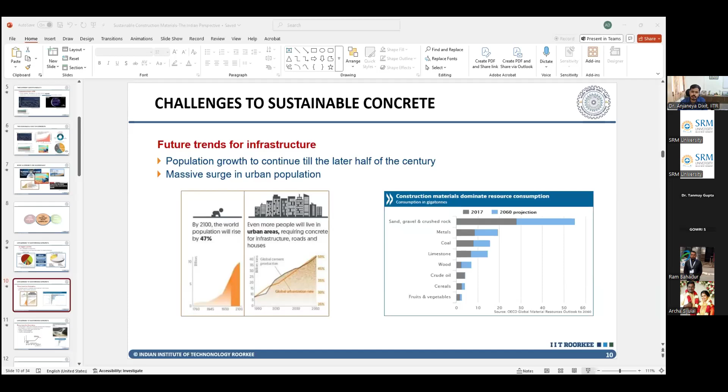Now, why is this important? It's important because all the constituents of OPC, or any form of cement, come from earth. So any material that is able to replicate the composition as is means that you will not require a lot of extra material or extra processes other than the bare minimum needed, such as heating, calcination, clinkering, etc.

So OPC as such is very optimized. Add to that, you have about one century, or even more now, almost 1.25 centuries worth of data on how OPC based concretes behave.

And that's very important because we want to construct a lot of our buildings that we want to last for 100 years. The embankments that were created for the rail Chenab, on their own, are supposed to last for more than 100 years.

That is possible because we know how the concrete is going to behave in that environment under those loading conditions. We can predict what will be the strength left after 100 years, and whether it will be good enough for the bridge or not. So doing away with OPC with something that does not have a big knowledge base is the challenge.

Furthermore, it's not like our population is going to come down very soon. There are predictions that it might peak much earlier than was anticipated, but we'll still see about 47% rise by the end of this century.

We have seen this in India that rural centers are losing their population and most of them are moving towards urban centers. And urban centers, by definition, require a lot of concretization. Where is that concretization going to come from? From all the sand, gravel, and rocks that we're using.

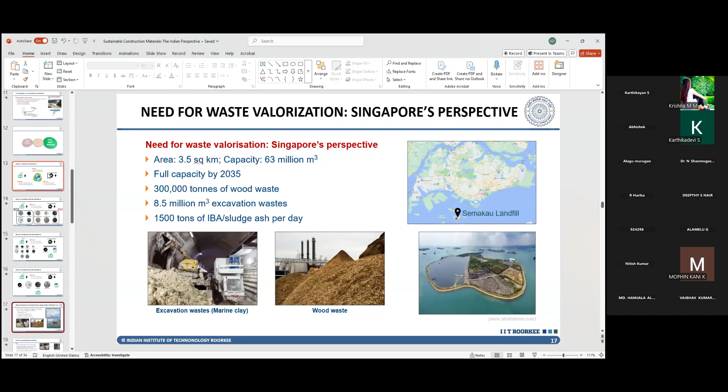Thank you. So this is what I was talking about, that we recycle, we choose the right kind of material for recycling, based on the compatibility, the availability, and the economics. And based on that, I'll discuss these three materials which are in different stages of acceptance and research.

And I was talking about Singapore. So on your screen, at the bottom there is a small island, and the photograph shown here. Singapore is dumping all its burnt waste, the ash, here, and has no further backup plan once it runs out of this island. Half of that island is only the available land for their ashes. So they're aggressively trying to recycle or reuse as much of their material as possible.

So what we did in Singapore was we used clay, which if you heat, you can produce a pozzolanic material that can be used as an alternate to cement. And not just that, if you use it in the right amount, it can not only impart good strength, it can also improve your durability.

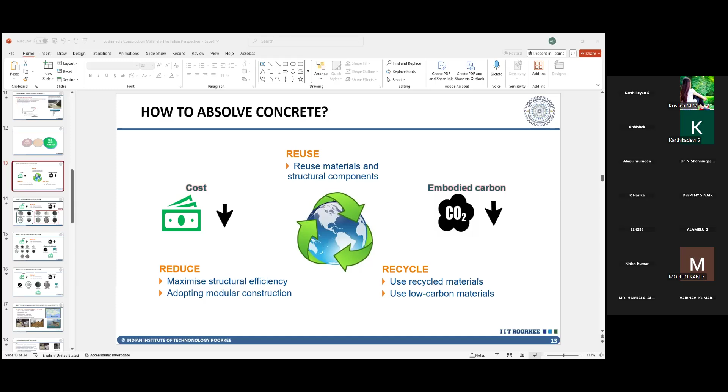And in India, you have IS codes for Portland calcined clay pozzolana, as well as a very recent code, IS 18189, which came a couple of years back. That's on limestone calcined clay cement, LC3.

So during my research in Singapore, we tried a lot of ways to utilize this excavation waste, majorly as a binder, but we also dabbled with using it in combination with other binders, making pellets out of it, and coming up with lightweight aggregates that could either be used for non-structural applications or even for structural applications.

Coming back, in Singapore we did about 5 types of different clays with varying kaolinite content. Now kaolinite, for those of you who may not be aware, is a naturally occurring mineral in clays.

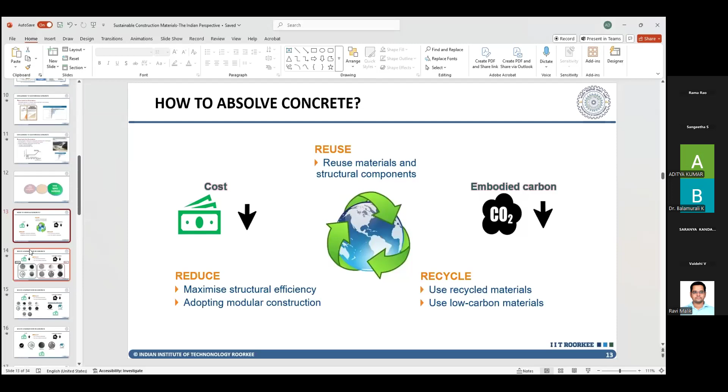Okay, right. So this is again the compatibility, the availability, and economics issue. And the landfill I was talking about in Singapore, where they're dumping all their ash.

And this is what I was talking about. So kaolinite is a naturally occurring mineral in clay. If you heat that clay, if you heat the kaolinite to 600 or above temperatures, there is atomic restructuring that occurs at that temperature. And if done right, you obtain a different structure, like this. This structure is called metakaolin. This metakaolin has reactive aluminates and silicates which can react with the calcium hydroxide that is generated because of cement, when water is added to cement, which is basically a pozzolanic reaction.

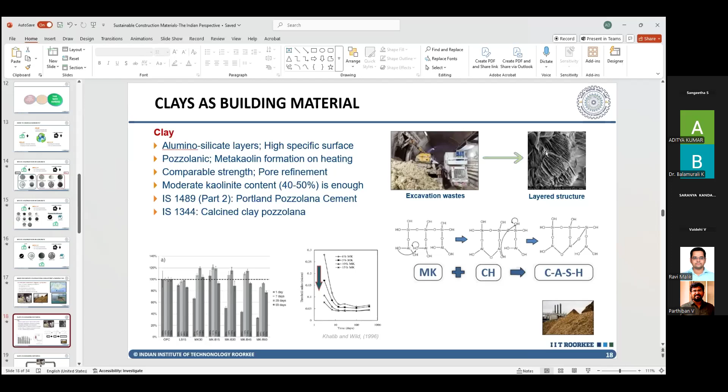Even fly ash works the same way. Fly ash plus calcium hydroxide gives you CASH, or calcium aluminate silicate hydrates, which are the binding entity in concrete. So with that idea, we developed binders and fillers out of this excavation waste. We also developed pellets, which were used as lightweight aggregates for structural and non-structural applications.

We studied about 5 different clays with different kaolinite content, and therefore different reactivity, because the more the kaolinite, the higher the reactivity. We found that depending on which kind of clay we are using, compared to a normal OPC based concrete or mortar, we were able to get up to 3 times improvement in durability, measured using the rapid chloride permeation test.

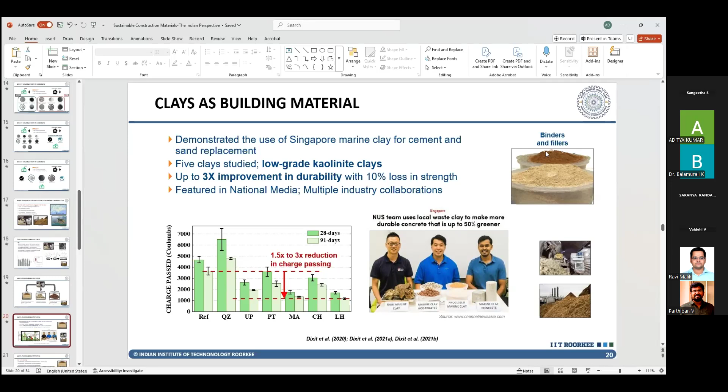We got featured in the local news channel for our work. In IIT Roorkee, I'm using clay without heating for generating printable mixes, low carbon printable mixes, and we have achieved very good performance, because clay can act as a natural viscosity modifier and can help improve extrudability, the ability of concrete to come out of the printing nozzle, and buildability, the ability of concrete to stack up in layers without collapsing.

So clay is something that has very easy acceptance in the construction industry, because even historically, surkhi is a common word that has been used, and surkhi was a very common ingredient added along with lime, because bricks were being manufactured millennia ago, and lime was readily available to them. So they used to add surkhi to lime to solidify their mortars.

This is nothing but a pozzolanic reaction happening. You use lime, which is calcium hydroxide, and surkhi, which is nothing but burnt clay, metakaolin to some extent. You add the two and you have pozzolanic reactions, producing insoluble hydrates which will not wash away with water.

So clay, the understanding around clay, its global availability, and economics also matter. If you try to produce it, we are still yet to break even. But if you're producing cement using metakaolin, or the limestone calcined clay cement (LC3) I talked about, it's very close to the cost of normal OPC.

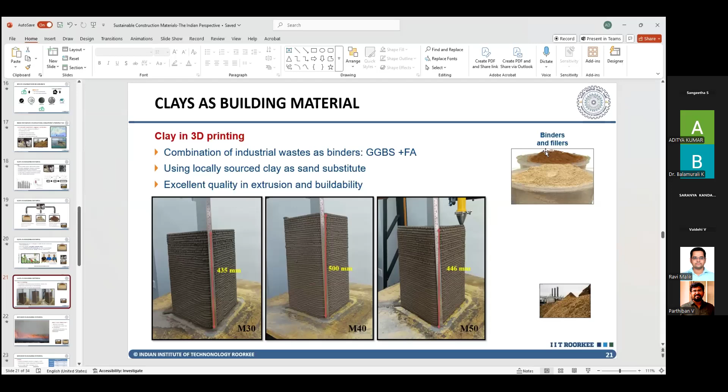Jumping to the next material. Incineration in India is a very big problem. North Indians, you are at the heart of that incineration problem in Sonepat, and you would see every year for 2 months, and the residual effect for the remaining 4 months at least, so much carbonaceous particulates in the air that it has actually become a calamity, and we are not able to find large scale solutions so that the alternative to burning becomes profitable.

One of the ways to do this, apart from other techniques, we have started using rice straws to produce plates, utensils, cutleries, or papers and pulps. A big industry can be concrete itself. This second material, biochar, is very much known in research, but is yet to be translated into industry. So that brings us to the second stage of material.

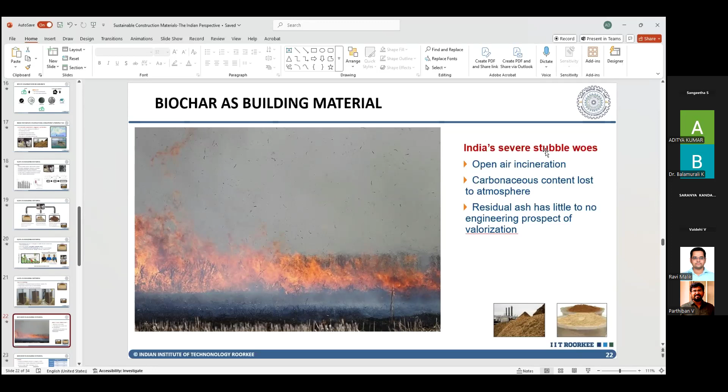What is biochar and how do you produce it? If you burn any wood waste or organic matter in open air in the presence of oxygen, you are letting the carbon in those materials interact with oxygen, produce carbon dioxide, and go away into the atmosphere. But what if you heat that in the absence of air? In such a case, all the fats, lignins, cellulose, hemicellulose in the wood waste will go away, and what remains is about 70 to 80% pure carbon.

If you look at the table on the right top, this was another study we did with raw sawdust, where we had about 44% carbon content, elemental carbon. The moment we pyrolyzed it at 500 degrees centigrade, heated without oxygen or air, the char obtained was more than 70% carbon. So essentially, all this carbon which would have gone to the atmosphere, you have saved and kept inside.

The advantage, in addition to all this, is these materials are porous. These are some electron microscope images, so you see there's pores in those materials. Now these pores are excellent sites to retain water, and if used in concrete, they can act as what's called an internal curing agent. A material that holds water in its pores, and when mixed in concrete, when the concrete is gaining strength, it can provide water from the inside also.

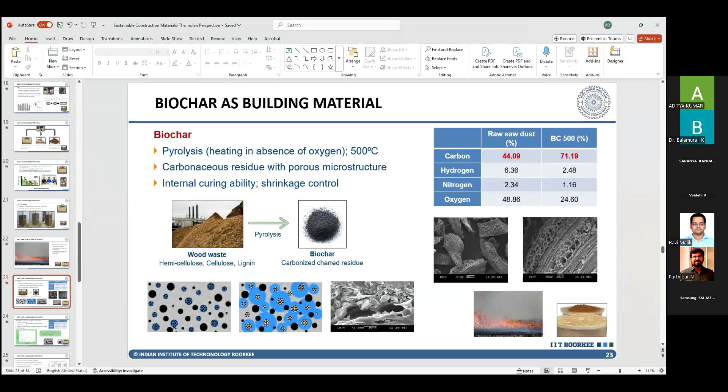So that's the advantage you can get from biochar, in addition to storing carbon directly inside that char. But the challenge is the pyrolysis condition, and from where you're getting this material, the source material, the feedstock. Because some organic matters such as peanuts are high in phosphorus. Now if you use these materials, make a char out of it, and then use it in the concrete, you're adding phosphorus into the concrete, which is not good. We try to limit all the alkalis and such kinds of materials in limited form when we're using them in concrete.

The other thing is how stable your char is, because it's an organic matter, and in concrete we have a big no for any organic matter to go in. You have to ensure that the char you're using is virtually essentially an inert material.

To do that, you use what's called an oxygen to carbon molar ratio. You test that, you find out how much oxygen is present in comparison to carbon. The less the oxygen, the better it is, because it's the oxygen that creates those reactive functional groups which might do unwanted reactions. So the less the oxygen carbon ratio, the higher the stable life of the char is. Usually we prefer 0.2 or below, which is very easy to obtain through normal pyrolysis itself.

Furthermore, the temperature at which you heat the biochar, and the speed at which you reach that temperature, control the amount of pores and the type of pores generated in the biochar. This is important because if you want to use the biochar for internal curing, you want a specific size of pores to be available, no larger, no smaller. Smaller pores will not be able to hold water effectively, and larger pores will create voids inside the concrete that, instead of providing internal curing, will act as weak zones.

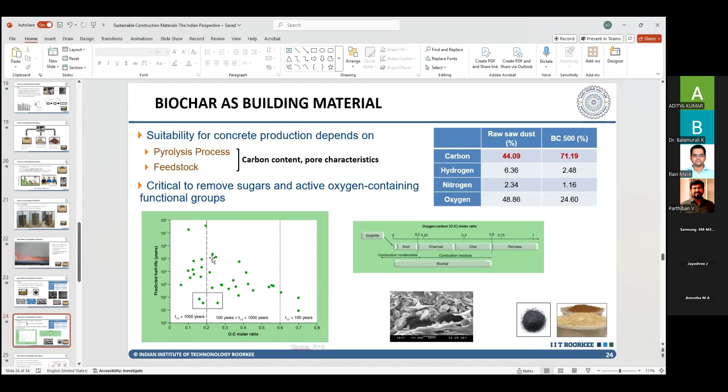So what does the research say around this? Well, if you're using normal concrete, you can go as high as 10% by weight of cement. So suppose you're using a normal concrete with about 350 kg per cubic meter of cement content, you can add 35 kg of biochar in it. And that 35 kg, assuming 70% carbon content, would be somewhere around 24-25 kg of pure carbon that you're storing inside the concrete.

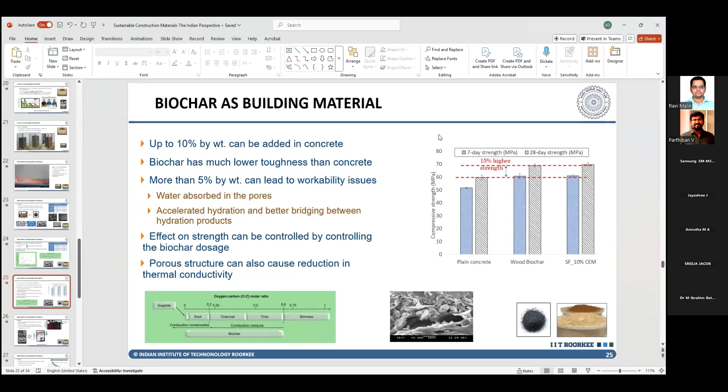Multiply that by another 3.67 times to get the carbon dioxide equivalent that you have stored inside your concrete for one cubic meter. And not only that, when you're doing so, you're able to increase your strength as shown here, because the internal curing effect of your biochar can help improve the hydration. Even though the biochar itself is weak, the additional hydration products that it generates can improve the strength.

Now, a very peculiar case of UHPC. UHPC is ultra high performance concrete. These are very special types of concrete that have strength above 120 megapascal. So the majority of my PhD research was on UHPC, and I used biochar to see if that internal curing effect could be obtained in these concretes also, because for UHPC, external curing works very ineffectively. On the first day itself, the density of the UHPC becomes similar to what a 28-day-old normal concrete would be. So in a 28-day normal concrete, if you try to cure externally by putting it in the water tank, it will not work. The same is the case with UHPC.

So we tried to cure it internally. But what we found was, yes, there was a very significant increase in the amount of hydration taking place. But a bigger finding was that we were able to control the shrinkage in UHPC. Again, another problem in UHPC is that you trade strength with shrinkage - very high strength, but also very high shrinkage. We were able to control that shrinkage by using biochar, because this biochar kept releasing water in different parts of the concrete, and it didn't allow the concrete to shrink as much as it would have without biochar.

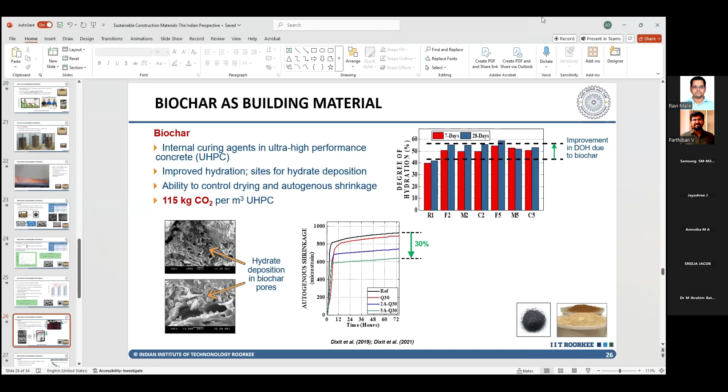The same is the case with normal concrete. You can see a large reduction in shrinkage if you're using biochar. And as I've said, you can also see high early strength if you're using biochar, provided you have prepared it correctly from the correct feedstock.

So this is about biochar. For now, biochar has not yet found commercial acceptance because the feedstocks that are being used traditionally don't have utility in the concrete sector. Organic matters generally stick to one industry, which is organic based, like paper pulp or pulp-based utensils or cutlery. So it is yet to come at large scale in the industry. The translation of research to the field is still awaited, but the research is overwhelmingly positive. It says you have to fine-tune the biochar, but you can get desired properties relatively easily.

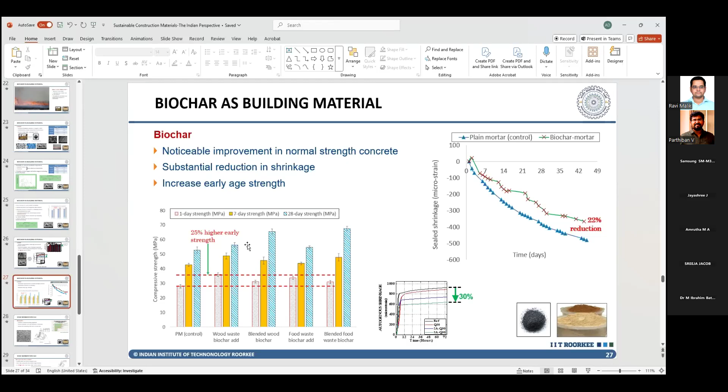That brings me to the third leg of this talk: MSW, or Municipal Solid Waste Incineration Ash. In India, we've started to become more aware of how we deal with municipal solid waste. The Ghazipur landfill is one of the biggest eyesores and a real nightmare for the administration to get rid of. I'm glad the other two landfills near NCR are being taken down, and in due time I think the Ghazipur landfill will also be taken down and repurposed.

But what do they do with the waste they're taking out? That waste has to go somewhere. If it's being reused or recycled, very good, but I don't think a big chunk of it is reusable or recyclable. So why don't we incinerate that? The Government of India has taken a lot of initiatives in the waste-to-energy approach.

What they're essentially doing is taking the waste, segregating it properly, separating out all the dry waste that has good calorific value, and incinerating that. By doing so you get two advantages: you reduce the volume by about 70 to 80%, and more importantly, you're able to generate electricity out of it.

When I gave the example of Singapore, where they incinerate all their waste and dump the ash there, they generate 5 to 8 megawatts of energy depending on how much waste they're burning. This is all from just one plant, and they have 3 or 4 similar plants. Their energy requirements are in the thousands of megawatts, but still, being able to generate electricity just from waste management is a very good idea.

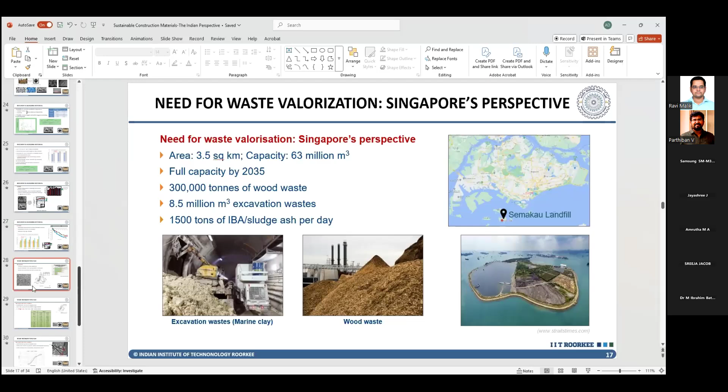As a matter of fact, one of the waste-to-energy plants in Bidadi, Bangalore generates about 11.5 megawatts of electricity just by burning waste. So incinerating municipal solid waste and generating ash is a good way to manage your waste. The ash generated is relatively inert. Mostly 80% of the total ash is bottom ash, and 20% is fly ash that goes through the exhaust. So I'm focusing on the bottom ash for the moment.

Looking at India's trend, particularly in the major cities where this incineration will actually work — first of all, incineration is not something that can be applied to every municipality. A tier 3 city, it definitely will not work, it will not be viable. But for a tier 1, or even tier 1.5 or tier 2 cities, they generate 6 to 7,000 tons of waste every day, and out of that at least 50% is dry waste.

So their waste-to-energy plant works well, but they still become economically unviable because the electricity they generate, they sell at approximately 7 to 8 rupees, whereas from solar or thermal you get it at much lower cost. So to stay competitive, they have to find other avenues of producing money. What can that avenue be? Produce the ash and sell it as a construction material. Of course treatment work etc. is needed, but that's one of the financial models they can try.

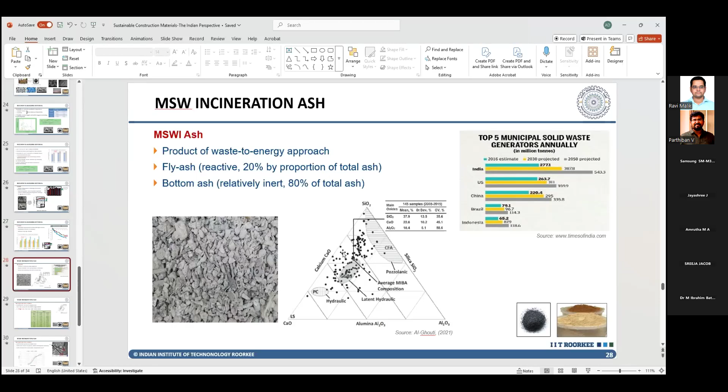So when we tried this out, we got ash from one of the plants in Sonepat itself, and what we found was the bottom ash is very high in silica, alumina, and calcium, but also in phosphorus and alkalis. And that's a big red flag. We don't want these materials — heavy metals, sulfates — in our construction material that's eventually going to end up in concrete. So that is a challenge.

Also, the research around municipal incinerated ash, MSW ash, is also nascent. It's very variable because the MSW itself is variable. You don't even have to go to different cities to compare — take just one city and monitor the waste ash for just one month, and you'll see such a big fluctuation that it becomes very difficult to suggest one technique for how to make this ash usable for engineering applications.

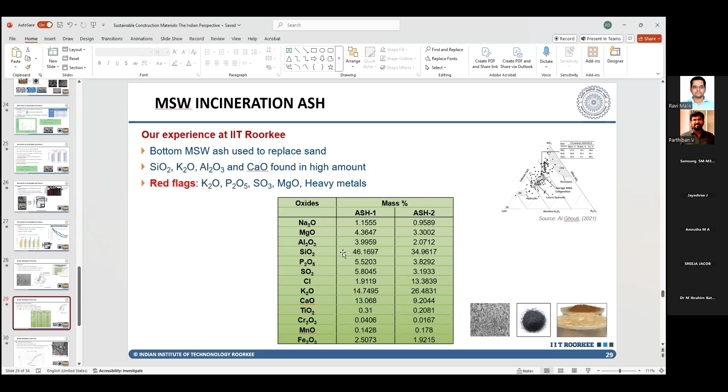So right now we are trying to replace bottom ash as a sand replacement. But the challenge is that this ash is highly porous. It stores a lot of water when we try to replace natural sand with this ash, and it reduces the workability really bad. Essentially, the ash is not as strong as the sand it replaces, so you see a big drop in the compressive strength too.

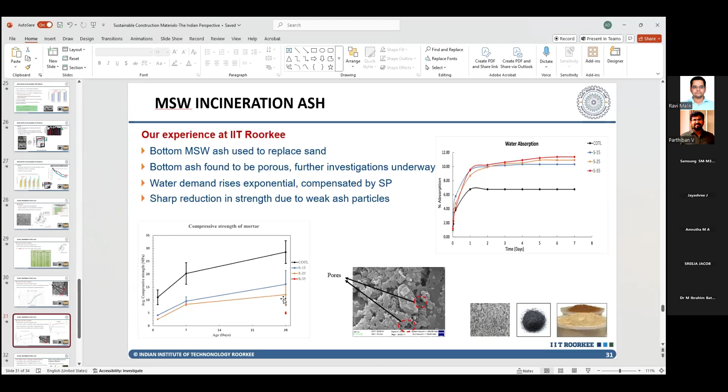This is in the nascent stage, and only time will tell how the research progresses. But if tried, municipal ash presents a big opportunity, because in one major city in India we generate 5 to 8,000 tons of waste. If waste management and segregation become efficient, this idea can take up, but segregation in India isn't effective yet, so a lot of low calorific value material ends up in these plants. A plant rated to generate 10 megawatts might need additional fuel, or use extra electricity, to burn materials that are wet or of low calorific value. That's a big challenge right now.

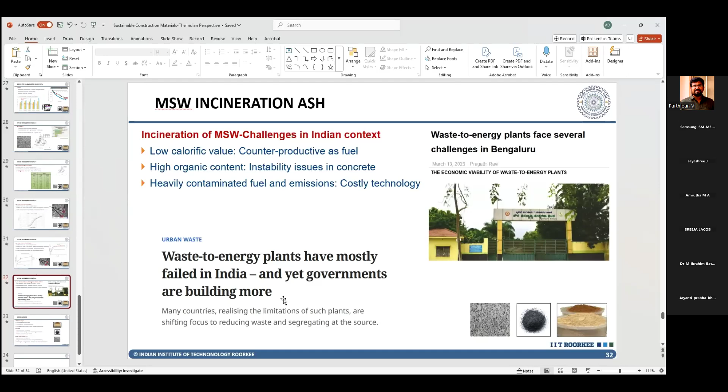But because we started incinerating hardly a decade ago, we're still new to this. We'll learn our way, and if we keep trying, we'll find a way out. So, to conclude, I discussed three different materials that are alternates to concrete: two alternates to cement, and one alternate to sand, at different stages of research and practice. Calcined clays are very well accepted in the construction sector, biochar is well established in research but yet to be taken up by industry, and municipal ash is still new in both research and construction industry.

So with that, I'd like to stop. I thank SRM University again for having me over and giving me the chance to speak on this topic, and I'll be happy to answer any questions if there are any. Thank you.

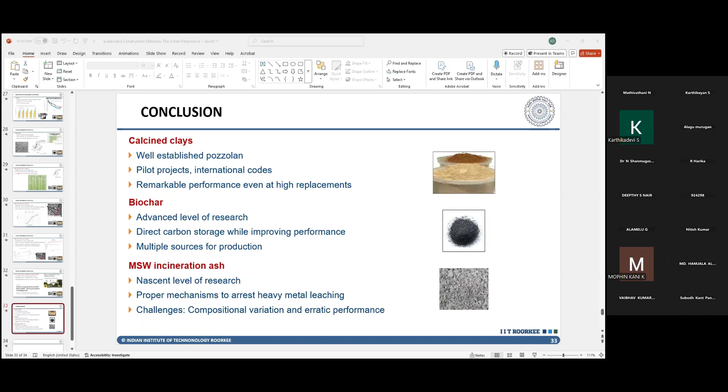There's a question: how sustainable and market-available is biochar? In India, biochar is yet to take up. We are not producing biochar for the purpose of construction. A lot of biochar, or rather activated carbon, is being produced for filtering purposes, as activated carbon is a big constituent of filters. So traditionally, whenever we produce any kind of char or carbonaceous material, it's mostly used for these kinds of materials.

Any other question? One more thing to add, Professor, is that this is just one or two research points, so take what I'm about to say with not just a pinch of salt, but a handful of it. If you're able to extract everything out of biochar as much as possible, for every ton of organic feedstock you pyrolyze, since pyrolysis is an energy intensive process, if you extract all the oils coming out and store as much carbon inside the char as possible, you end up saving 870 kg of carbon dioxide per ton of feedstock pyrolyzed. That's one research data point. But unless pilot projects are taken up in the field and data is generated for large scale implementation, only then will we know how sustainable biochar actually becomes.